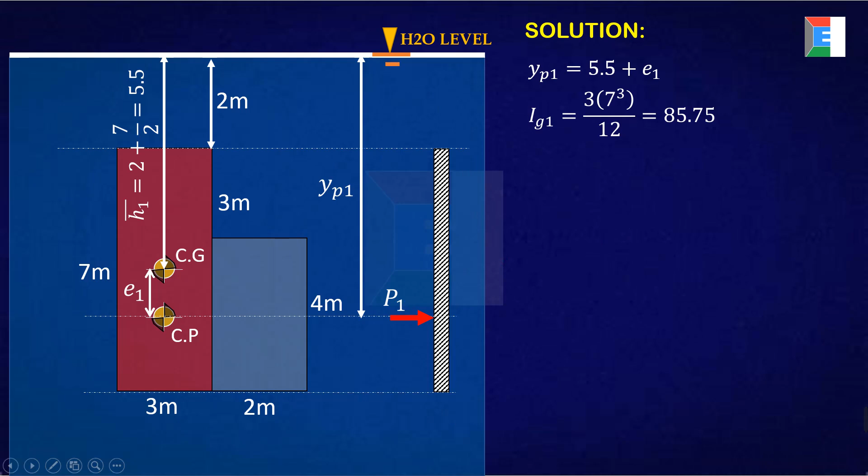So, first, kunin ko muna yung centroidal moment of inertia. So, I have 3 meters by 7 cube divided by 12. So, we have 85.75. Okay, so I have 85.75. Double check ko lang, minsan kasi hindi ko na-check ulit eh. So 7 cube divided by 12. So the answer is 85.75. Correct. Okay. So yung E natin, that is 85.75 over yung area, which is 3 meters by 7 meters.

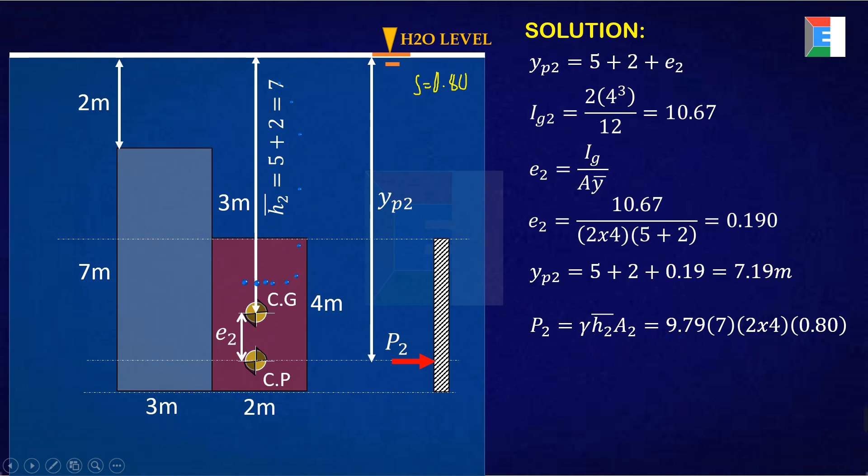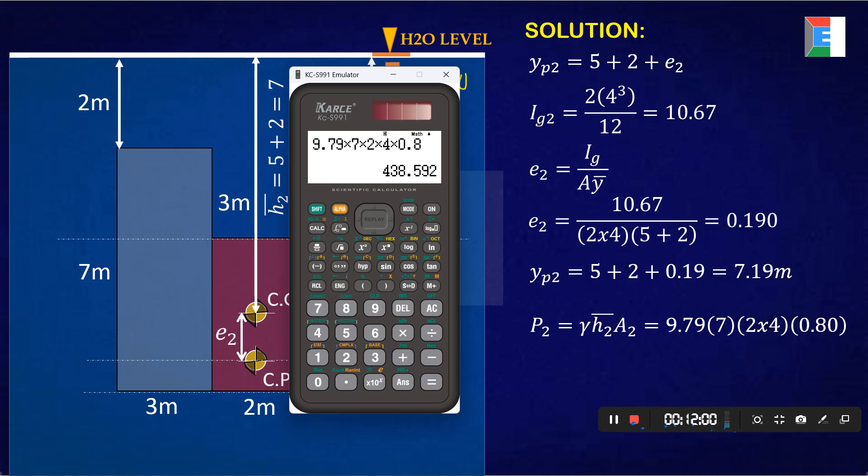So, using our calculator, we'll get 9.79 times 7 times 2 times 4 times 0.8. So, we have 438.592.